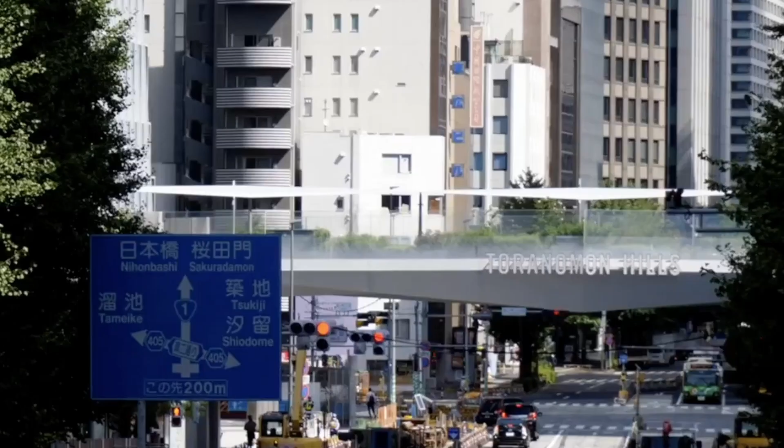Last week, we explored the facade design, BIM optimization, structural system, and seismic design of the station tower. This week, we will take a closer look at the underground construction process of both the station tower and Toranomon Hills Station. In 2014, a long-term vision for the Toranomon area was formulated through the Tokyo Urban Redevelopment Council.

This vision aimed to strengthen transportation nodes by the 2020 Tokyo Olympics and Paralympics and beyond, ultimately creating an accessible urban transit system for everyone, including international visitors. This led to the development of a new station in the Toranomon area.

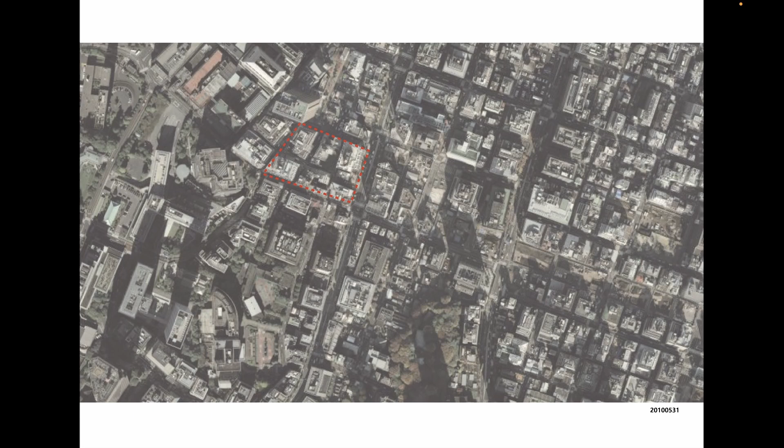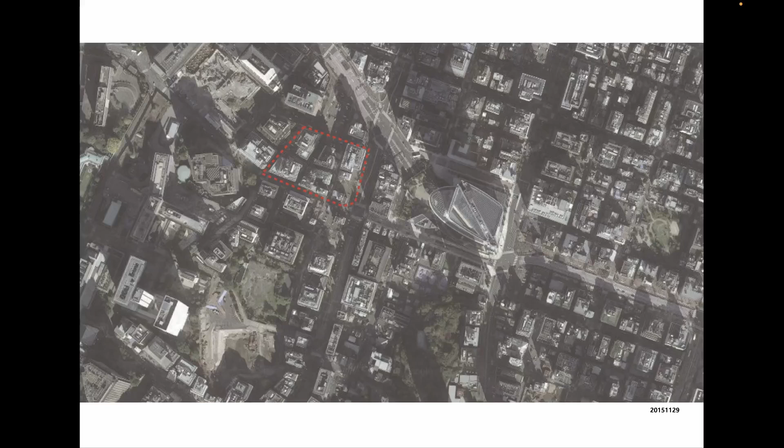The Toranomon Hills development project, led by Mori Building, began in 2009 as a TOD, Transit-Oriented Development, within the Toranomon 1-chome District. It began with the construction of the Toranomon Mori Tower in 2011, followed by the opening of the Business Tower and Toranomon Hills Station in 2020.

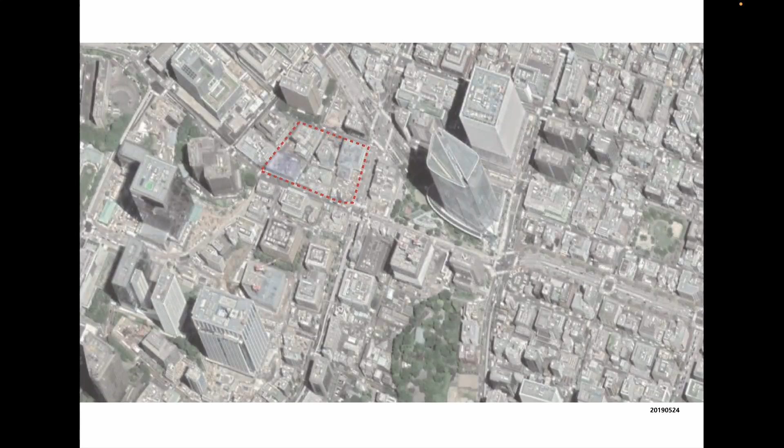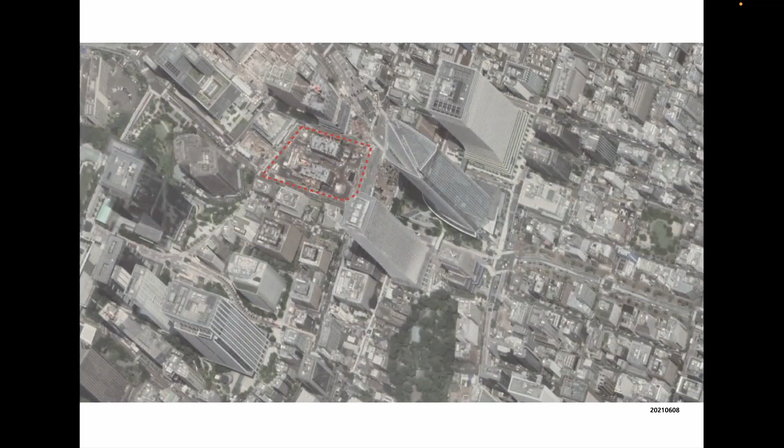The residential tower was completed in 2022, and the station tower and Toranomon Hills Station were finalized in 2023, concluding the large-scale redevelopment of the Toranomon Hills area. This project is often cited as a leading example of urban redevelopment in Japan. Just 1 year after the opening of Toranomon Hills, the foot traffic increased by over 7% and land prices surged by 34.4%.

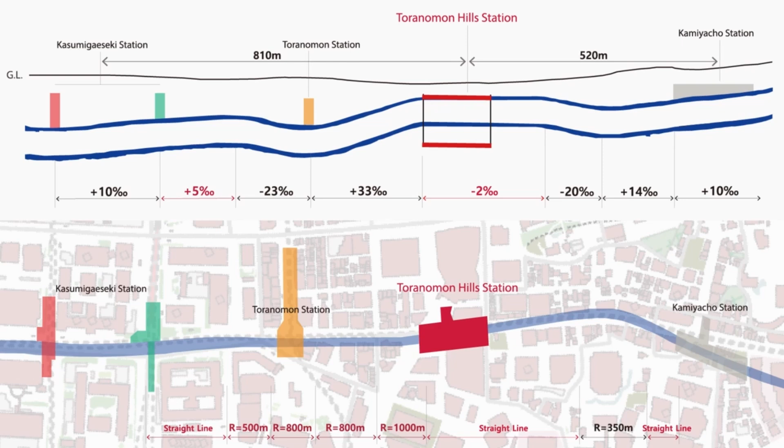When planning Toranomon Hills Station, the site had to be positioned at a reasonable distance from nearby stations. First, the location needed to have a longitudinal gradient of less than 1% to ensure a smooth and safe ride. Next, the track required a curvature radius of over 400 meters for structural stability and operational efficiency. Only one area met both conditions, a point between Kasumigaseki Station and Kamiyacho Station, intersecting with Ring Route No. 2. That's where the station was built.

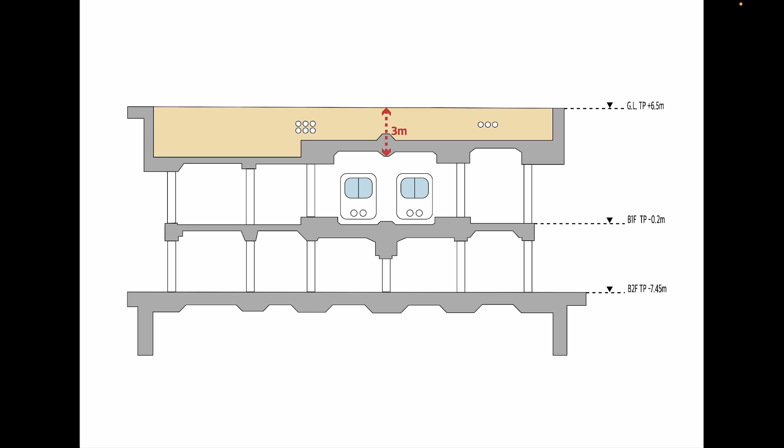One major constraint during construction was the shallow soil cover of only about 3 meters above the existing Hibiya Line tunnel. Because of this, it was impossible to build new station structures above the tunnel. Instead, the tunnel sides were expanded to install new platforms, and the main station functions, such as the concourse, ticket gates, offices, and mechanical rooms, were placed beneath the tunnel on the second basement level.

The design and construction were commissioned by UR and carried out by Tokyo Metro. In 2020, the B1 level Hibiya Line platform opened, followed by the B2 level concourse completed through underpinning in 2022. The full station and station tower were completed in 2023.

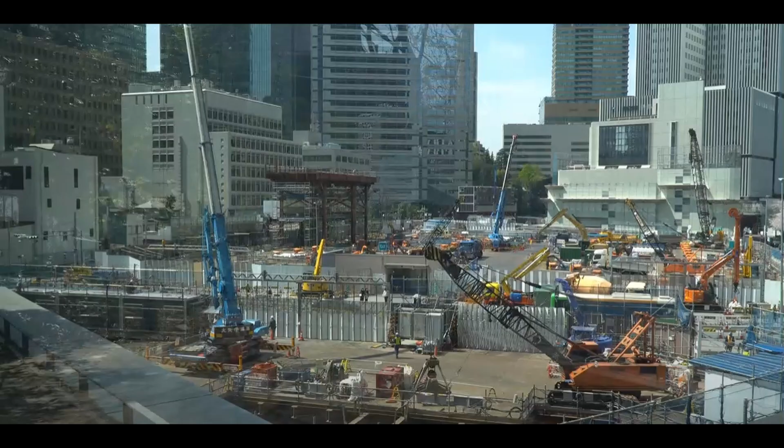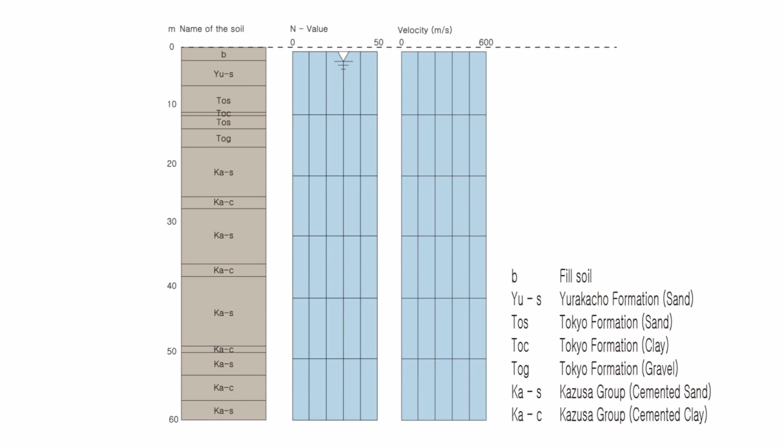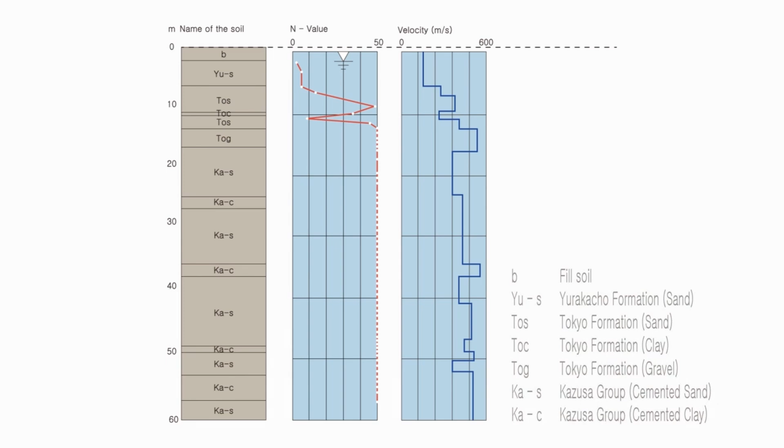The process began with a detailed ground survey beneath the future Toranomon Hills Station. Standard penetration testing and shear wave velocity testing revealed clay and sand layers down to 10 meters and soft bedrock and dense gravel layers below. Due to this soil profile, the earth drill method was chosen.

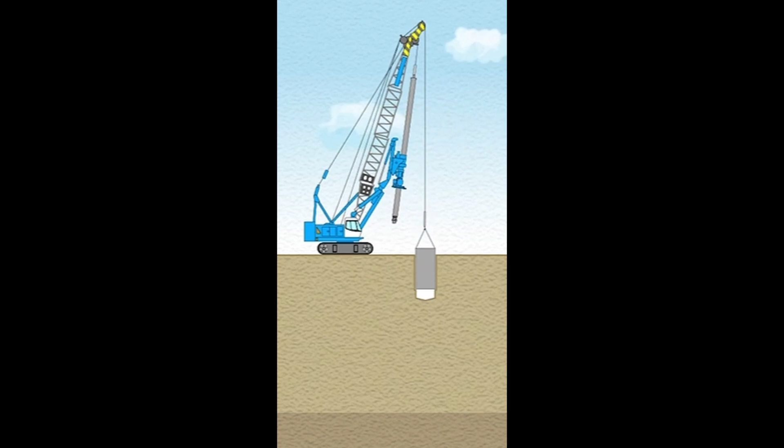This technique uses a large diameter auger to drill and install cast-in-place concrete piles. It is well suited for cohesive soils and urban construction thanks to its low noise and vibration.

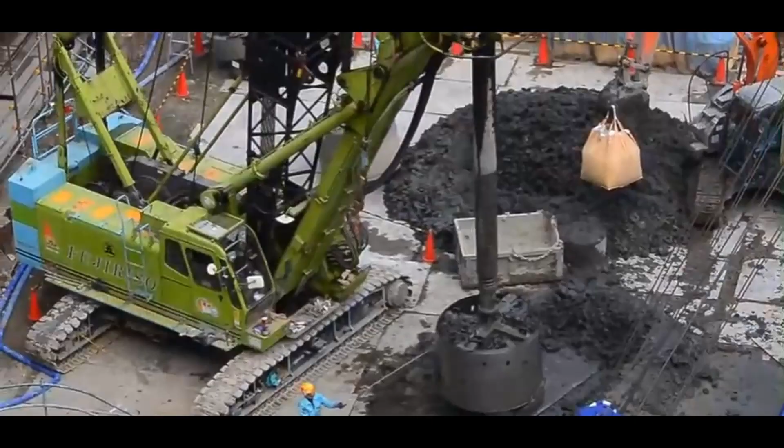The most critical part of the earth drill method is maintaining the stability of the borehole before concrete placement. To do this, stabilizing fluid was injected into the soil to form a mud cake, protecting the borehole through hydrostatic pressure. This allowed efficient work within the urban clay and sand layers.

Next, static load tests were performed on the piles drilled using the earth drill method. Given the enormous actual loads up to 90 meganewtons on the superstructure columns, pile depths of 42 to 44 meters underground were required, with long-term acceptable support of 3,000 kilonewtons per square meter.

The long-term acceptable support is the maximum load that the foundation can safely support in the long term, which is the typical support for low and mid-rise buildings, but is insufficient for high-rise buildings.

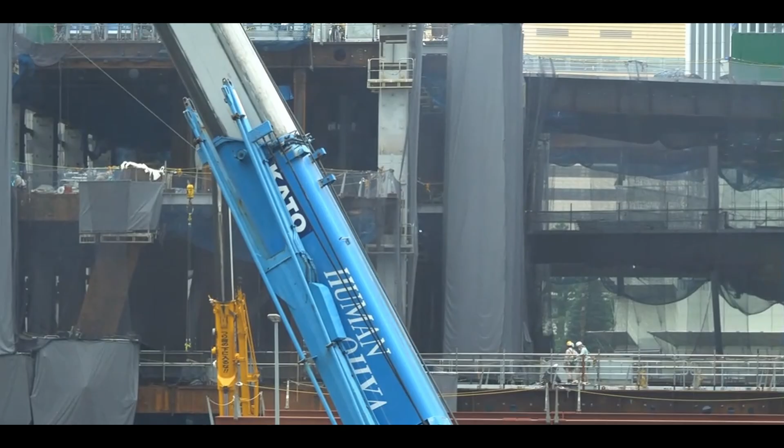For this reason, the Toranomon Hills foundation was applied with a piled raft foundation that uses both a pile and a raft foundation. In the pile-supported raft foundation, the raft serves to distribute the load of the upper structure and secure sufficient support, and the pile serves as a complement to support the upper structure by suppressing excessive subsidence of the raft.

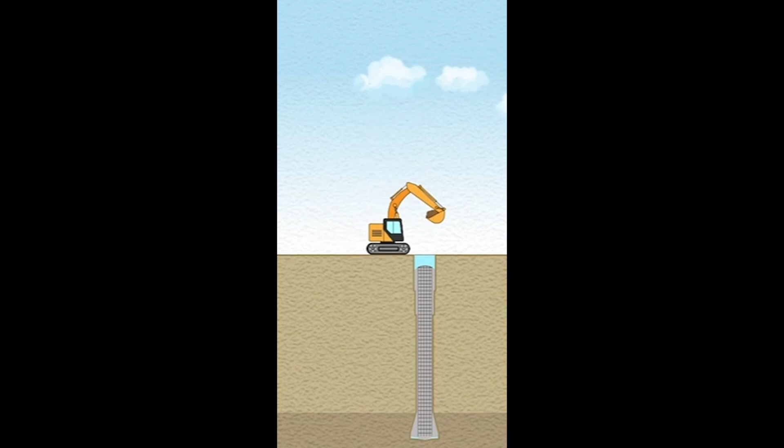In some cases, the load could not be supported by conventional piles alone. For example, two Y-shaped columns required support from 4 piles each. This led to the use of super knuckle wall piles, a proprietary technique from Obayashi Corporation. These piles form a continuous wall-like foundation that improves soil stability and reduces deformation. It was especially effective given the proximity to subway lines and roadways.

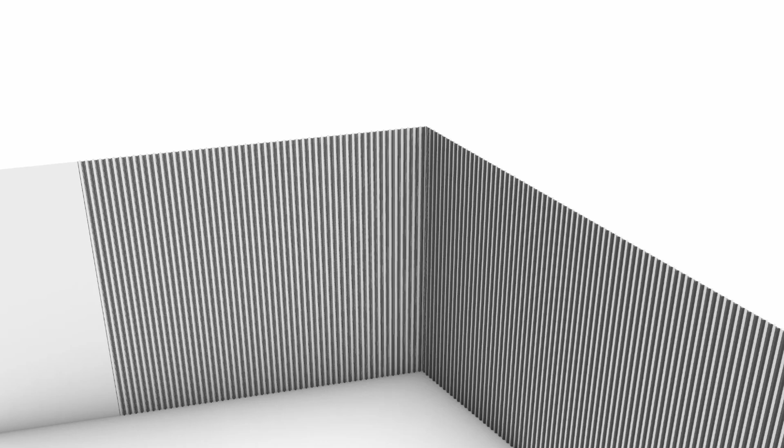Next came the earth retaining construction. Retaining walls are essential in urban excavation to prevent soil collapse and protect nearby structures. Common techniques include H-pile with lagging, sheet piles, and cast-in-place piles. In this case, the SCW soil cement wall method was used.

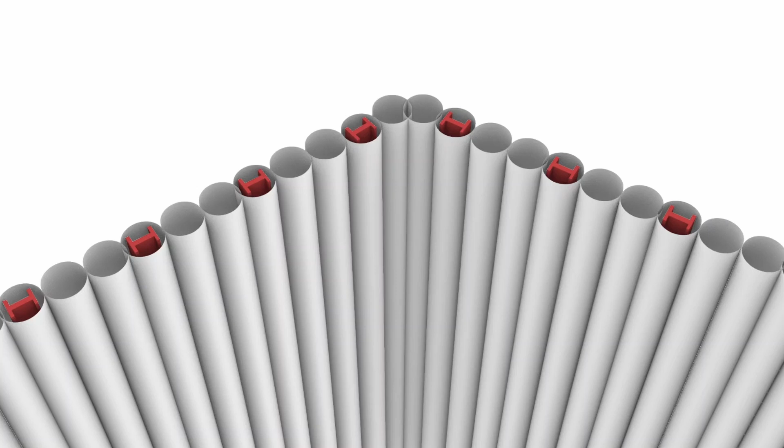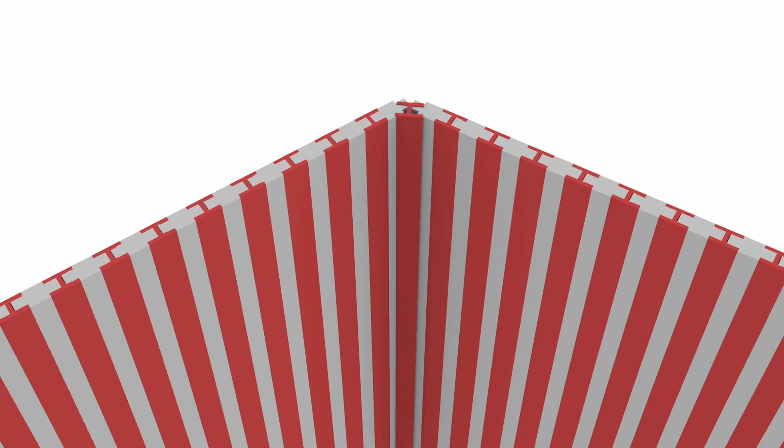It involves mixing the excavated soil with cement slurry using a multi-axis auger to create a continuous soil cement column. While Korea often uses 3-axis machines, the weaker Japanese soils led to the use of 4-axis equipment to enhance stability. SCW was ideal here due to its excellent water tightness and minimal vibration and noise, making it highly suited for city environments. It effectively addressed the site's loose sand, clay, and groundwater conditions.

To shorten the construction schedule, the top-down method was used. External basement walls and columns were installed first, and then excavation progressed downward while structural elements were built from the ground floor down. Column sizes and rebar arrangements were standardized. Wales and struts supported H-pile walls, and the SPS method was used to combine H-piles with lagging plates. This reduced stress imbalances during demolition and allowed simultaneous above-ground and underground work.

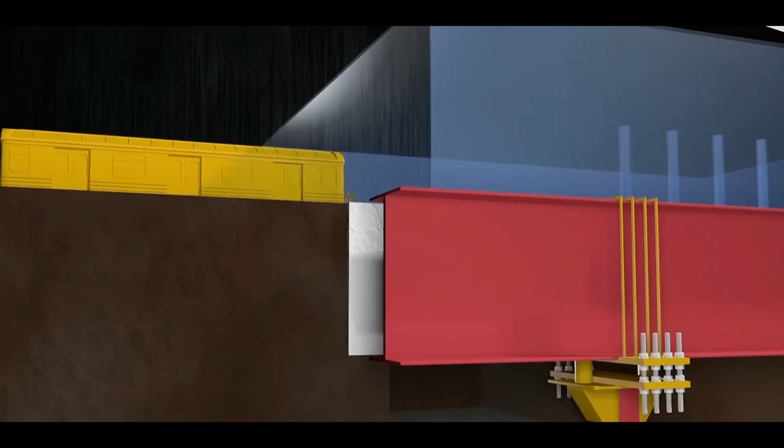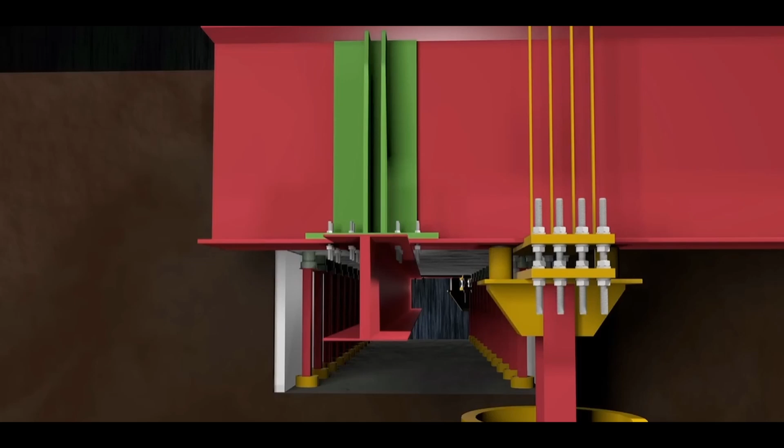Under the B1 Hibiya line, further excavation was needed to create a new B2 level. However, simply digging beneath the existing tunnel would have compromised its support. Underpinning was used instead. First, soil was excavated to a depth of 15 meters on both sides of the tunnel. Then small tunnels were drilled underneath the line, and jacked piles and steel frames were installed to support the structure. This allowed for safe excavation below.

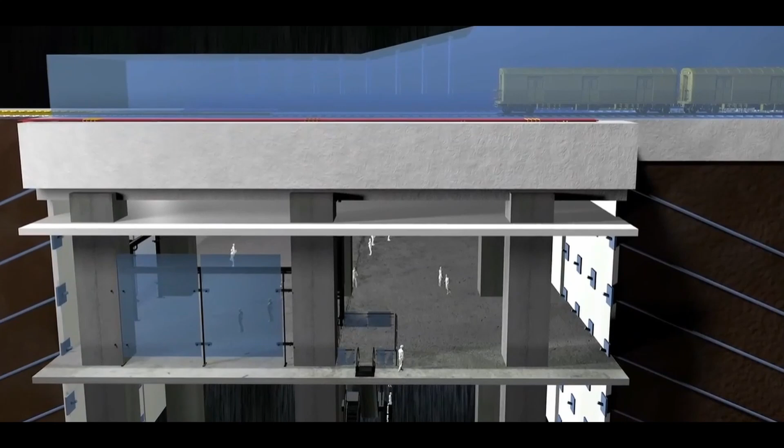Finally, soil stabilized with injected slurry was carefully removed, and concrete was poured into the created voids to form the new structures. Additional retaining walls were built around the site to prevent water ingress and ground settlement. Through these combined techniques, the construction of the station tower and Toranomon Hills Station was completed with both stability and efficiency.

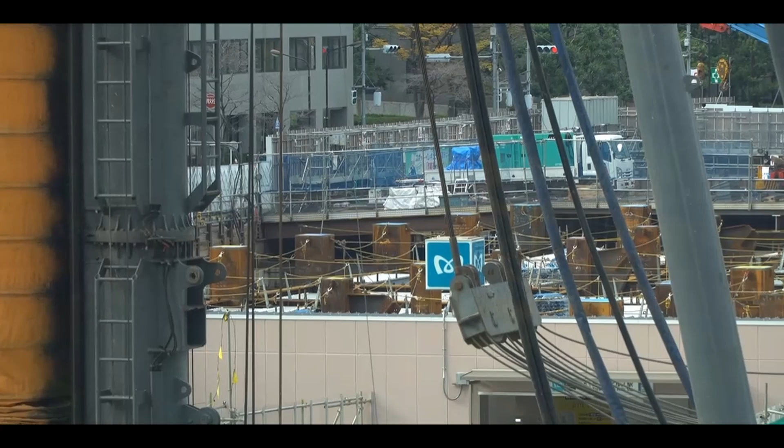Underground, where concrete meets silence and light has never touched, a new kind of space was made, one that holds the weight of a tower and the movement of a city. With each method chosen, not for convenience, but for necessity, the construction became more than a process. It became a quiet negotiation between earth, time, and people, completed not just with machines, but with understanding.